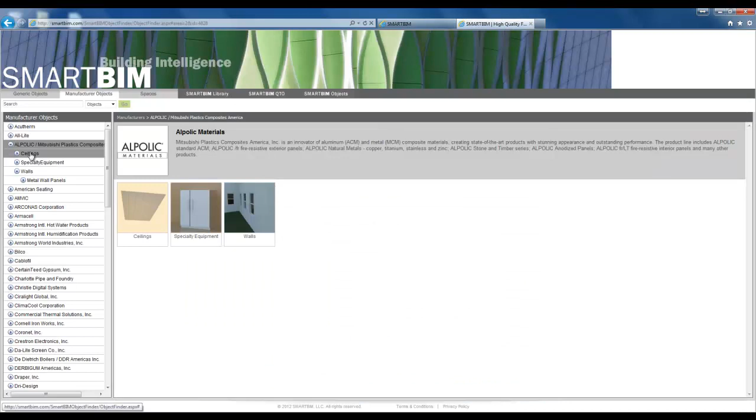ALPOLIC has engaged Smart BIM to develop BIM content to serve architects and engineers who are incorporating Revit content into their development. ALPOLIC has now released 67 products developed for use on 10 applications, ranging from ceiling panels to wall panels to custom column and skylight applications, which are freely available to the design community.

You can access these models on the ALPOLIC website or through ALPOLIC's listing on smartbim.com. By clicking on any one of the download buttons, your web browser will download the zip file locally.

Each zip file will contain the following artifacts: a thumbnail of the product, a DWF file which can be used with the Autodesk Design Review software, an XML file which contains all of the internal property data for the product, and the Revit file itself. Once we extract the model to our desktop, we will be able to open the Revit file in the Revit application.

There are two types of column details created, one for a square application and another for a circular column. Each model was developed so that the end user could change the panel sizing to accommodate their column sizes and height. The user can change the number of panels within the system.

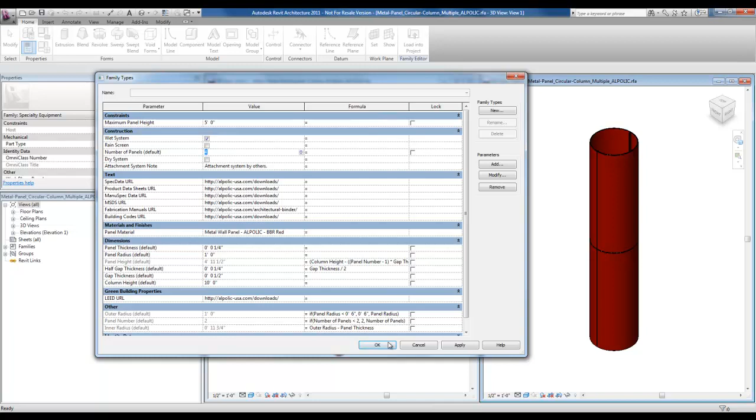The only exception to this is the number of vertical seams. Due to Revit limitations, the model only contains 2 vertical seams on each side of the paneling.

The properties contain all the relevant and necessary information for the architect to make informed decisions for these products. Each product has information assigned not only to the physical object, but to the material definitions as well. There is information within the material definitions that will drive the limiting size options available for the panels.

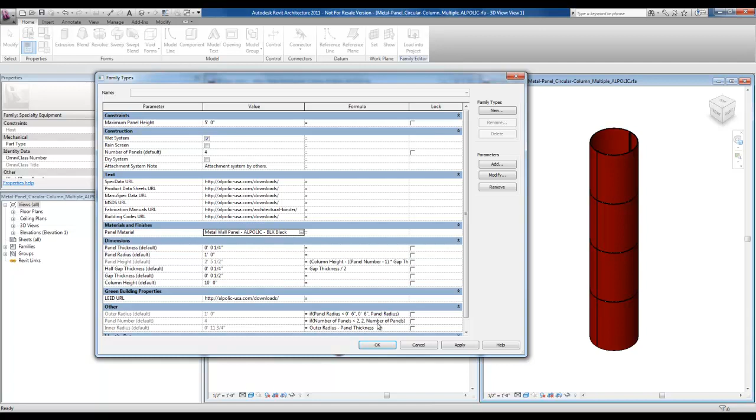For the architect to begin using these products in their project, they simply use the Load into Project option.

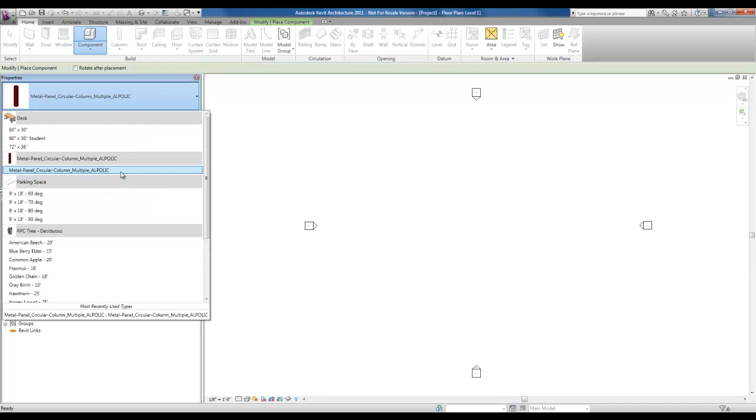Placing the model is very simple. Simply choose Components under the Home tab, choose the desired model and version, and then place the model as needed.

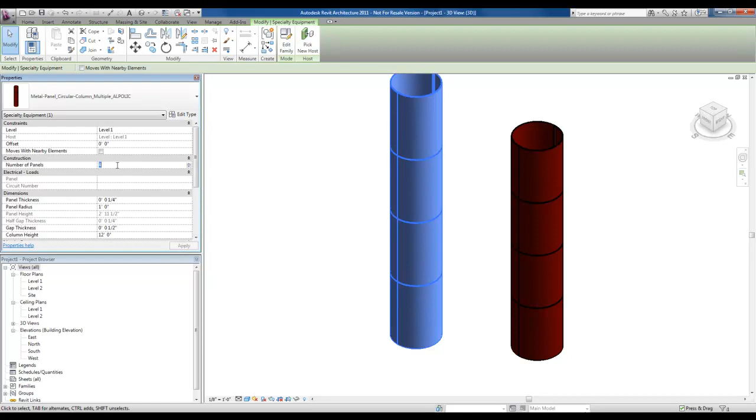After placing the model, it's a very simple process to edit the size and height of the model. By going to the Properties dialog box, you can edit the sizes. You can also see that all of the property information has been carried along with the model.

Wall panels, interior and exterior, as well as ceiling panels are pretty much identical when it comes to the import and placing process within the Revit environment. Unlike the column and skylight models, the ceiling and wall assemblies are contained within a Revit project file. This means that the typical import process is slightly different.

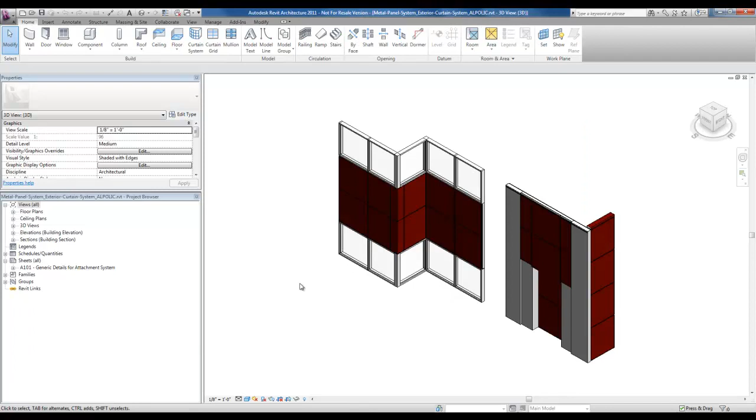Here we have the wall panel family shown in its various applications and attachments. The walls shown are for illustration purposes to serve as a reference when designing. Also included are sample generic details showing typical applications of the wall panels to the wall structure.

The brackets used for attachment are generic in detail, as these components are provided by others.

Similar to the properties of the RFA families, the wall and ceiling panels contain information on the physical model as well as information in the materials dialog box. The major difference here is that you will drive the size of the panels through the dialog box, in a manner very similar to building a curtain wall.

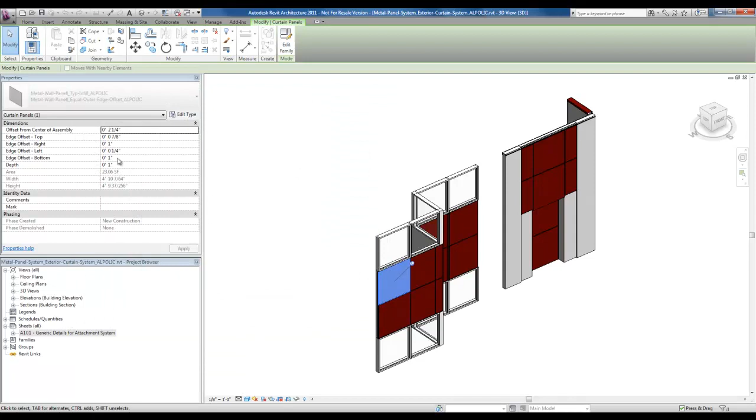Users will need to use Transfer Project Standards under the Manage tab to import these panels into their project. When the dialog box appears, the user should select Wall Types, Curtain Wall Types, and Materials.

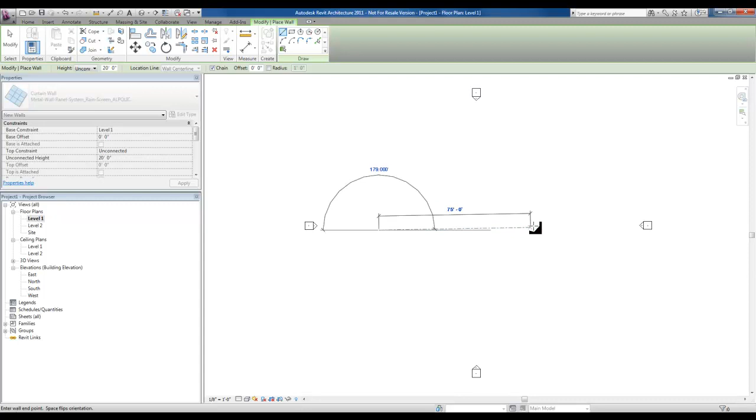To place the model, the user will choose Wall: Curtain Wall for wall panels, or for the ceilings choose Curtain System, both under the Home tab. After selecting the desired product, the user simply lays out the overall size of the system.

After creating the overall size of the system, the user can change the size and spacing of the panels by adjusting the dimensions within the properties.

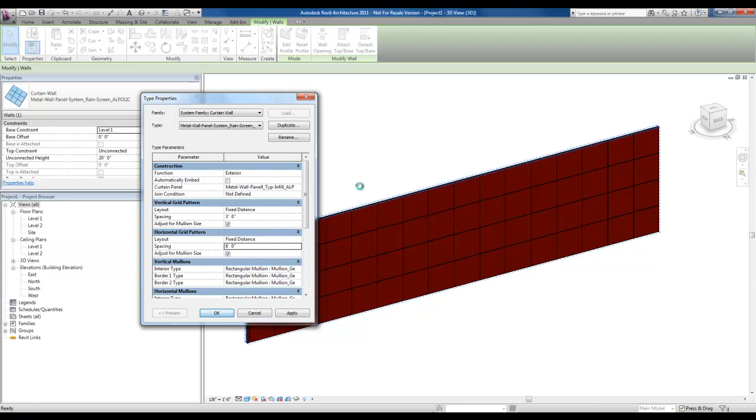Users can also change the individual panels and attachment profiles by selecting them, unpinning them, and then reselecting the desired replacement. Note that there are different panels for different applications.

Each panel also has adjustments in the instance properties to control the correct alignment of the edges of the panel to the generic attachment detail.

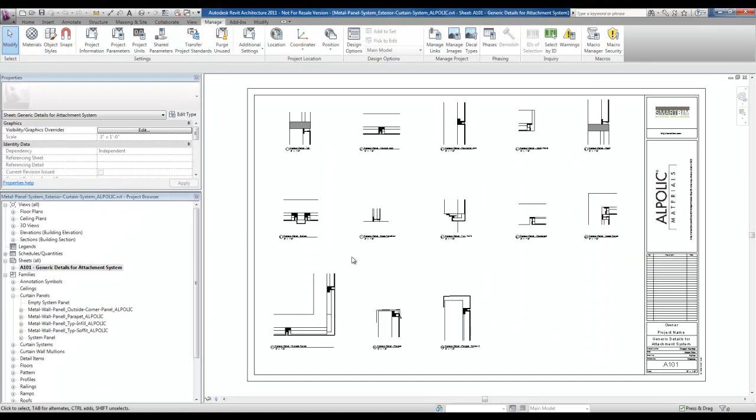Users should reference the detail sheet provided in the original RVT file for any questions about the location and configuration of attachments.

After all of the objects have been placed in the building, users can then create a schedule to determine product quantities. There are two types of schedules: one for physical products such as walls, doors, windows, etc., and another for materials, referred to as a material takeoff, where users can quantify items such as paints, surface finishes, or general material definitions. ALPOLIC products will utilize both types of schedules.

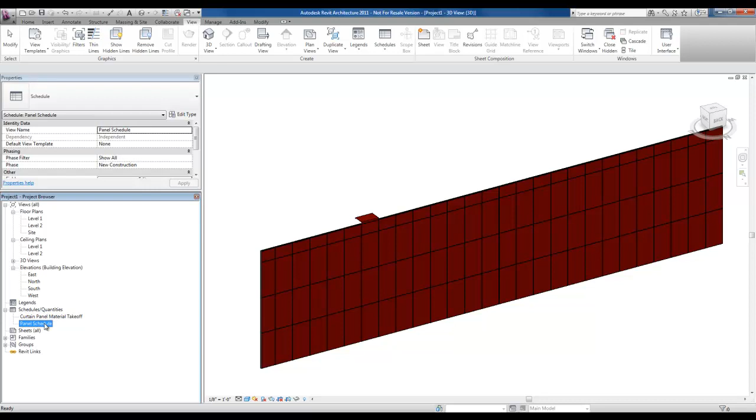A schedule for specialty equipment, walls, or curtain system will display the quantities and property information for these product types. A material takeoff will display the quantities and specific material definitions used in the wall, ceiling, and column panels.